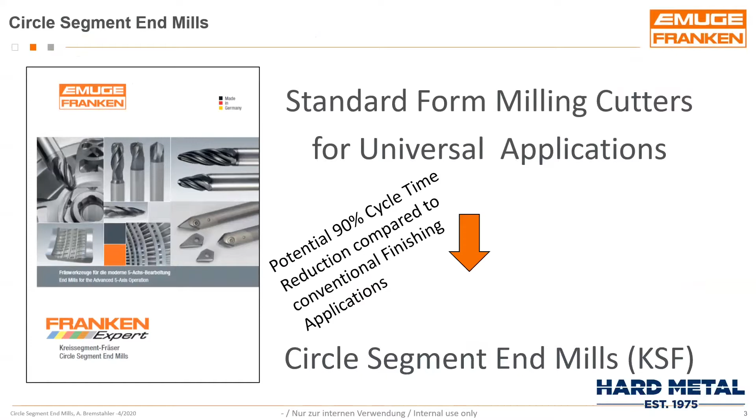Emuge Franken has a full range of standard milling cutters, but today I'm going to be talking about what they would call circle segmented end mills. Circle segmented end mills have the possibility to reduce cycle times by up to 90%. How we can do that is because when we look at today's technology for producing thin-walled surfaces, high walls, concave or convex surfaces, we have to scan using a traditional ball nose end mill.

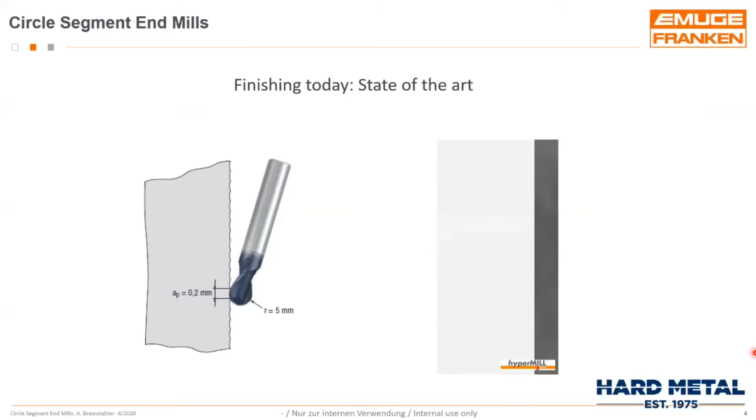And typically, if we looked at a 5mm radius or a 10mm diameter ball nose end mill, we would have to take step downs of 0.2 of a millimetre in the AP, in the step down, in order to achieve a high surface quality. So we're trying to achieve a small cusp height between the two steps. And this is where we have to take small axial depths of cut, and this can be very time consuming in order to achieve a high surface finish.

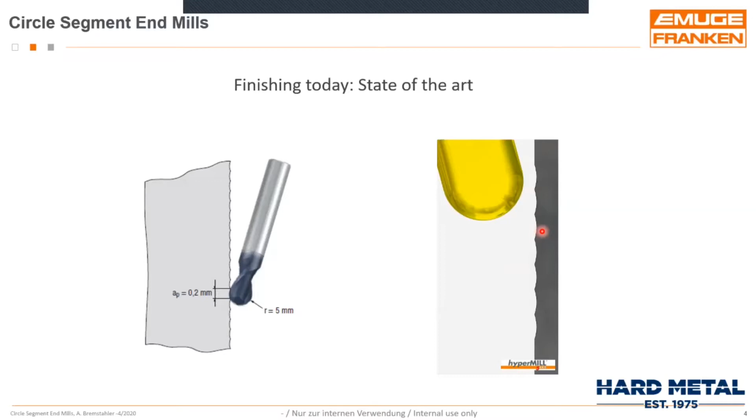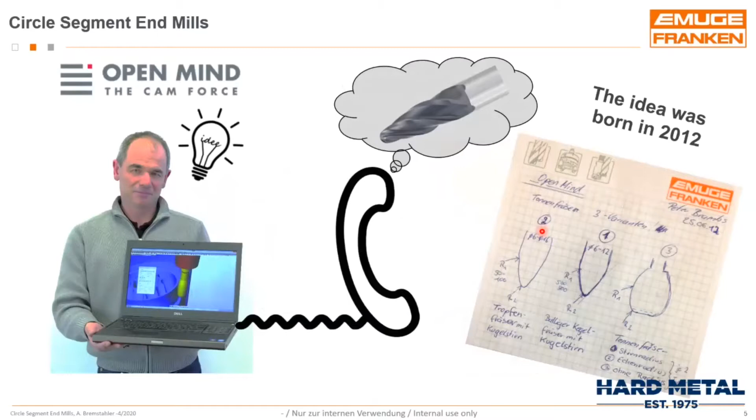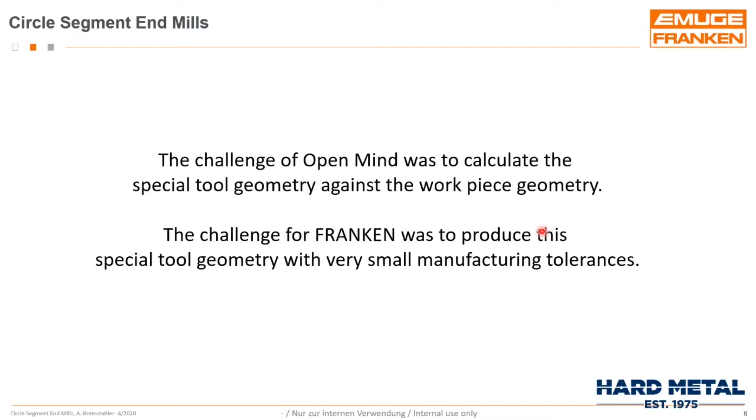Back in 2012, Emuge Franken and Open Mind got together and tried to think how they could solve this problem of reducing the cycle time dramatically. And on a sketch of paper, they basically came up with the concept of circle segmented tools. So how does the system work? Firstly, it was a challenge for both Open Mind and Franken together to define a geometry that would work against the workpiece, and for Franken to produce a tool geometry with very small manufacturing tolerances. So it was very much a partnership between the two companies to try and develop this technology.

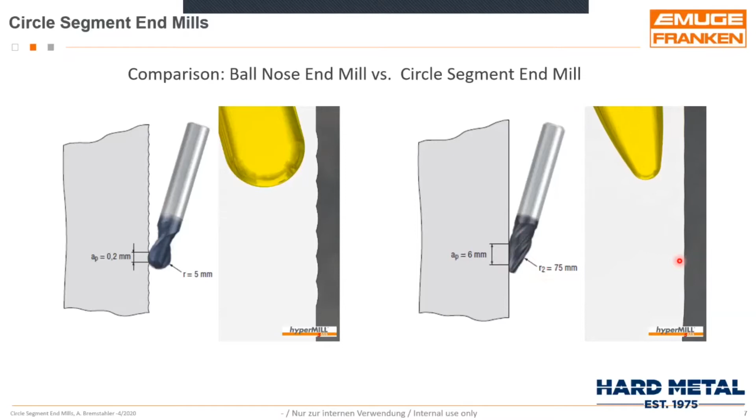So again, just to reiterate, on the left-hand side we see the traditional method of producing a thin wall, or a concave or a convex surface, with small step downs and small cusp heights in order to improve the surface quality. Whereas on the right-hand side, you'll see a very different shaped tool where we have a large radius, R2, of 75mm. This then enables us to take a much larger step down in the AP direction and create very small cusp heights between each step down, creating a very high surface finish. So this is where the concept was born.

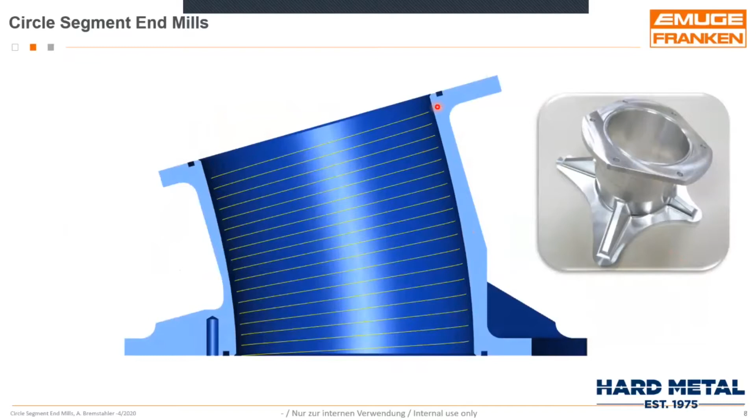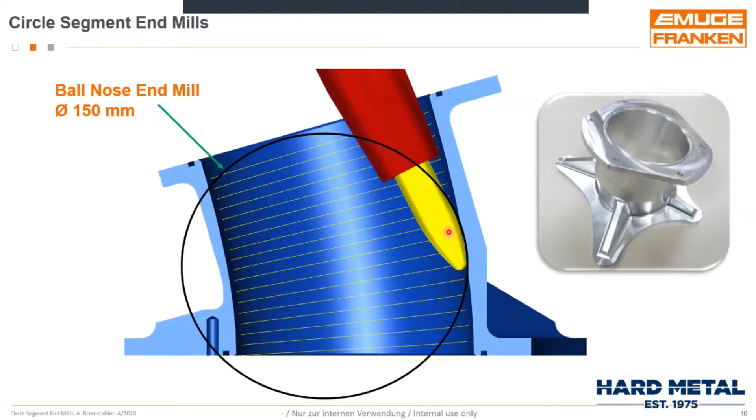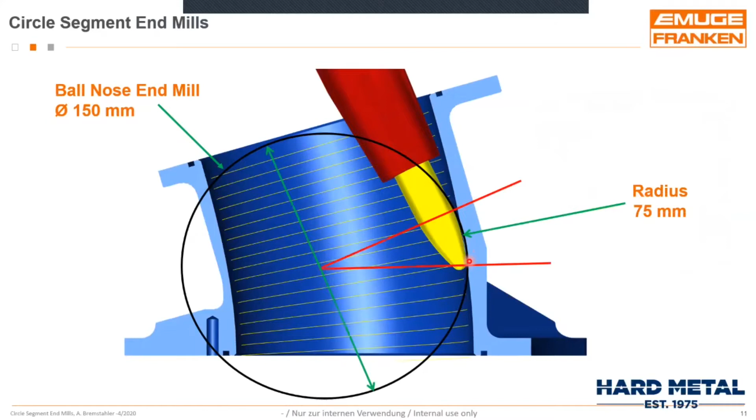If we put that into practice, if we look at a typical component here where we'd have to produce this concave surface using a ball nose milling cutter, in order to achieve something with a 75mm radius, we'd need a ball nose end mill of 150mm in diameter, which is totally impractical. So what we do, we take a part section of a tool, and we create the radius of 75mm on a segment, hence the term circle segmented tools. And now we can produce that large step down, whereas conventionally we would have been using small step downs. And this is how we reduce the cycle time dramatically.

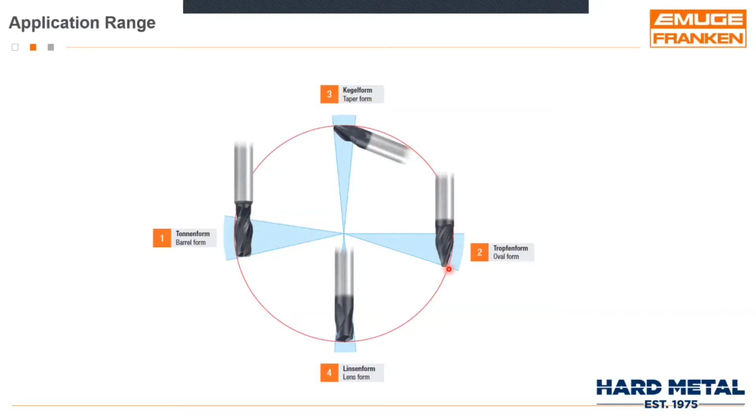So to summarise the range, it was developed, as I say, back in 2012. The range expanded in 2013 to include the two versions of the traditional taper and the taper tool. And then in 2015 they developed the lens type cutter. The lens cutter would be predominantly used for scanning flat surfaces or at the bottom of pockets.

In 2017, a further expansion included basically tools for machining turbine blades and the like. So these were specially developed with special geometries and through coolant capability. In 2019, they extended the range again with multi-flute type tools and even an indexable system. In 2020, the plan is to introduce micro circle segmented tools or barrel tools, and that will be phased in over the course of the year.

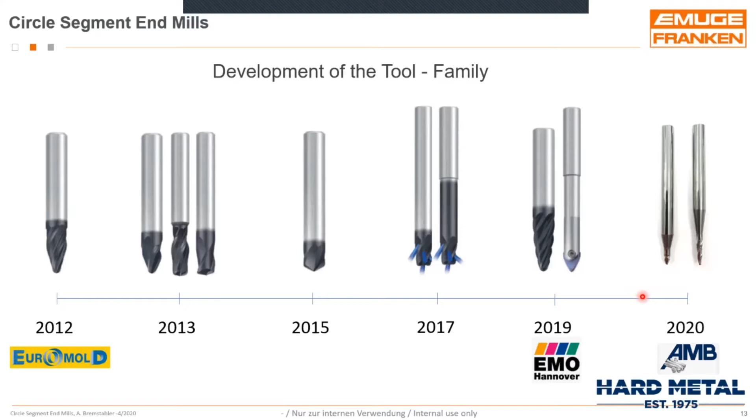They were to be introduced at shows, but unfortunately, as we all know, all of those sort of shows have been cancelled. So yeah, just to summarise, multi-flute options up to 6 teeth for both the taper form. These are used mainly on hard materials where we're taking small radial depths of cut. The new innovation of indexable systems gives us the flexibility to reach deep cavities.

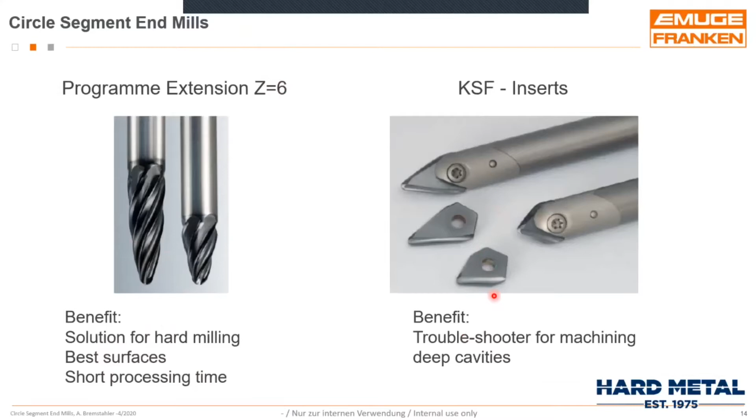As a supplier of both Emuge Franken and Hardmetal being a supplier of also ISCAR, ISCAR has developed its range of circle segmented or barrel mill type tools, which gives us the possibility to work within the medical industry because of our experience with machining the likes of cobalt chromes and titaniums.

What ISCAR have done is quite interesting in the fact that they've introduced the Multi-Master version, which gives us the possibility to use indexable heads in both the lens type, the tapered form type, as well as having the traditional solid carbide end mills. And as I say, given our experience within the medical industry, we are actively looking at developing tools specifically for producing the likes of the femoral knee.

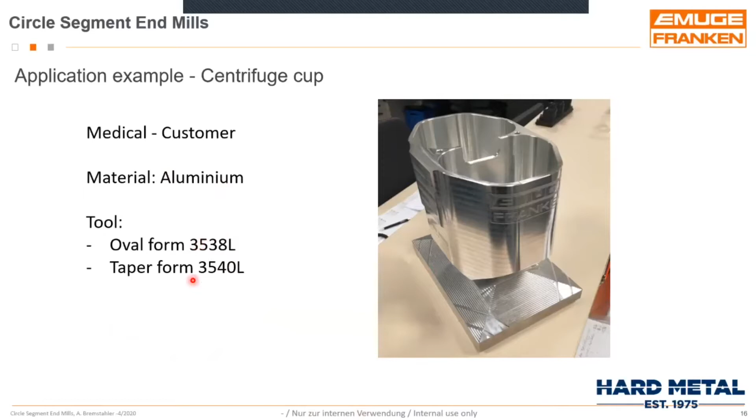I'm just going to show you a couple of videos before I move over to Simon. And this is usually to show you the tools in action. This is an example of a medical component made from aluminium using two types of the form cutters, the oval form and the taper form. And I'll just run you the video now.

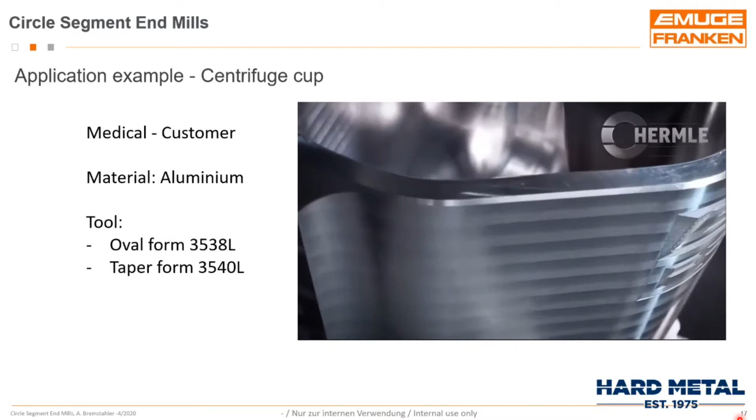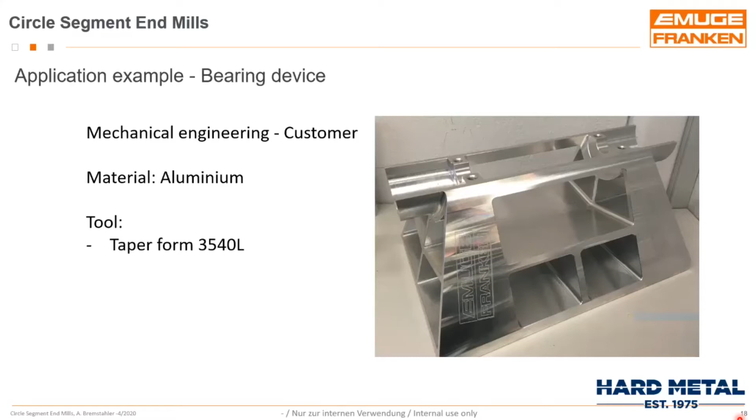Just moving on now to the next video, the rest of it was basically just face machining. So this is another example. This is using the tapered form tool, again, an aluminium component, mechanical engineering. It's just showing the tool again in a slightly different application area.

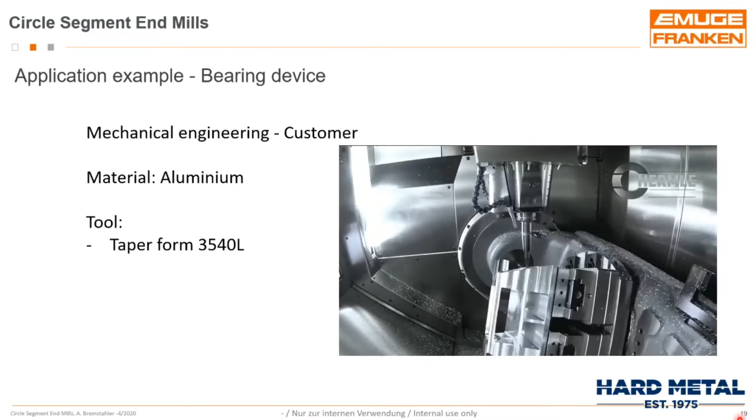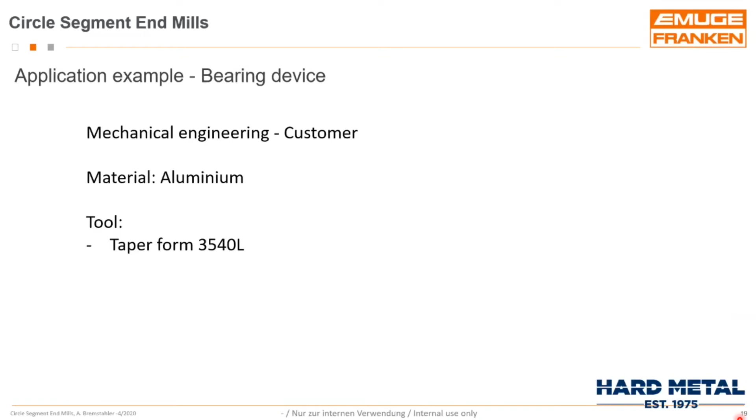Okay, what I will just add before I hand over to Simon is that the CAM package is vital in the success of using circle segmented tools or barrel mill type tools. So I'll now hand you over to Simon Docker from OpenMind.

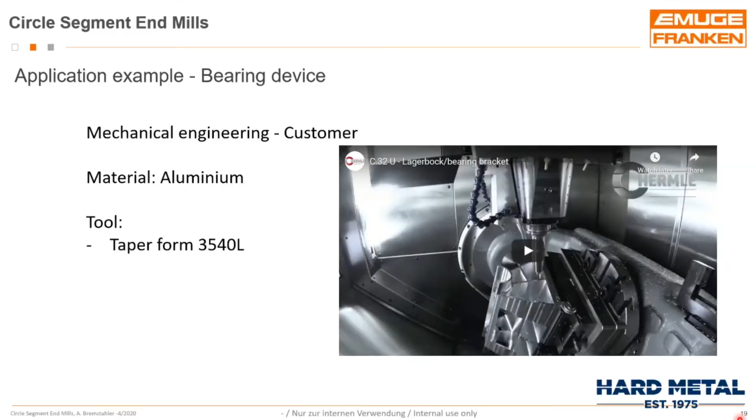So I'd like to focus on an aerospace structural part in the next few slides and some of the challenges that we experience today. We're seeing that the corner radius in pockets have been reduced to make parts lighter, and I see some very deep pockets. And when you combine a small radius in the corner with a deep pocket, this creates a machining challenge. Parts are becoming more complex, and certainly during the current situation, prices are being driven down. So really, how can we be more efficient, more productive, and reduce costs?

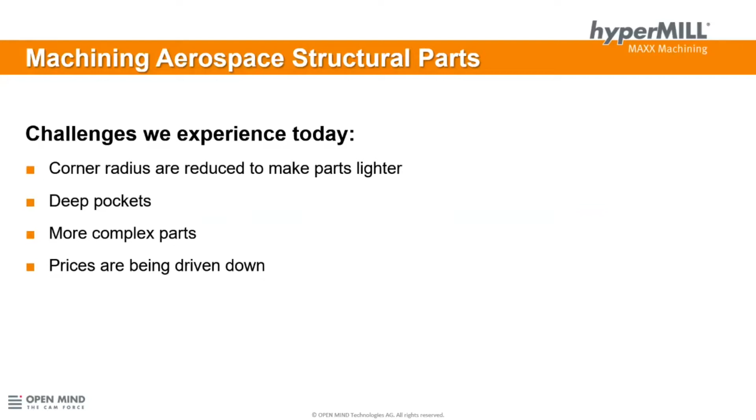Now, as Andy has already touched on, we can achieve faster cycle times using a combination of conical barrel tools or circle segment tools, as they may be called. But let's look at how this is possible. So what is the concept behind the design of a conical barrel tool? Well, as you can see, there is not only a long radius along the flute length, the tool is also tapered and ball nose. Now I'm referring to this tool here.

So this is where the tool is very effective, as the taper forces the tool to tilt, avoiding the collision between the part and the tool holder, and the ball nose allows us to use the same tool to finish areas such as small radiuses in the corners of deep pockets that I mentioned previously. So because you're tilting the tool away from the part, this allows you to keep the tool length to a minimum, and therefore tools are more rigid and less likely to produce tool chatter.

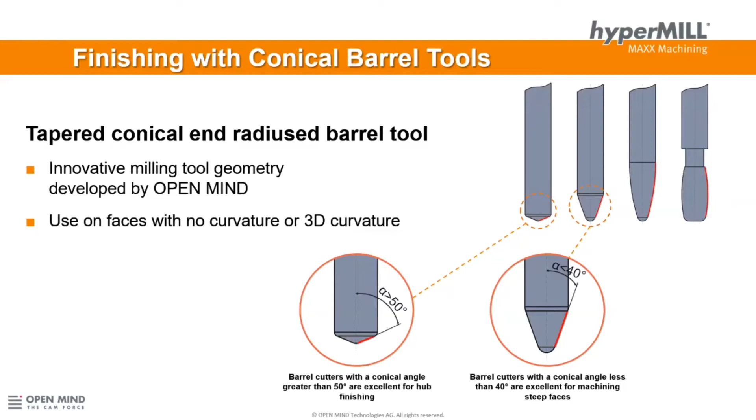So the potential gains can only be achieved if the CAM system has the necessary cycles, as Andy has just mentioned. So to utilize these types of tools within hyperMILL, there are dedicated cycles that have been developed especially for use with conical barrel tools, and I'll explain what these are. So the first one is tangent plane machining for planar surfaces, and it's extremely useful when machining deep pockets and hard to reach areas using conical barrel tools.

Now, typically to machine a deep pocket such as this one here, a ball nose tool would have to be used with the head tilted over to avoid the collision with the tool holder, but you would only be stepping down probably 0.2 of a millimeter, for instance, so the machining times will be obviously much greater. However, with the combination of conical barrel tools and hyperMILL tangent plane machining, you could be stepping down up to 6 millimeters, yet still achieving a superior surface finish.

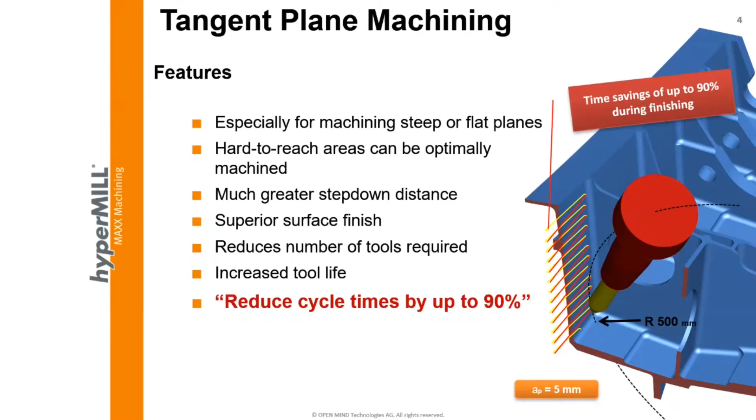Here's another example of a lens style conical barrel tool where the barrel radius is on the bottom of the tool, and these tools are useful when machining the bottom surface of very deep pockets. A conventional end mill couldn't be used in this instance because, due to the sheer depth of the pocket, that would be impossible because the tool would be too long. So again, the tangent plane machining cycle will be used for this face also.

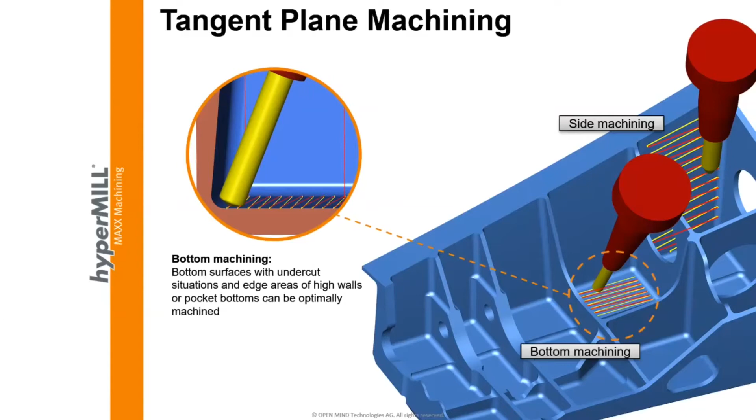So let's compare the machining of a planar surface using a ball nose tool against a conical barrel tool. Now, as you can see, if I run the video, the step down is much greater, so the cycle time will be much, much quicker. Now, this all seems so simple and obvious, doesn't it? But what is the technology behind the MAXX Machining cycles that makes them so special?

Now, as you can see, as the tool is traveling along the face, the head is being tilted simultaneously away from the surface, and this avoids the collision between the holder and the part, and also reduces the excess material left in the corners. Now, if I can stop the video at this point and just go back one moment, just slightly.

So the very fact that we're stepping down at 6 millimeters, this will leave a wedge of material in the corners, and you can see the wedges here. But within the same tangent machining cycle, there is an option to clean up the corners using a rest material style approach using the ball of the tool. And I'll let that continue, and you can see here.

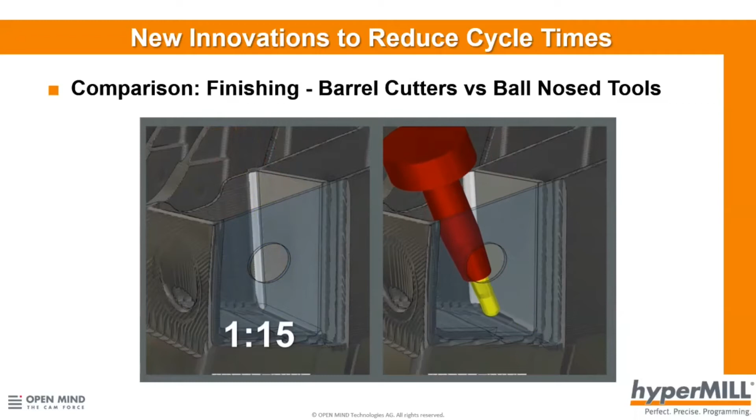So within the same cycle, using exactly the same tool, almost 2 cycles combined into one, using both elements of the tool. So we conclude that this is a multifunctional tool and CAM cycle to utilize the whole tool and reduce the need for additional tooling to be used. And obviously the time comparison speaks for itself, it's much, much quicker.

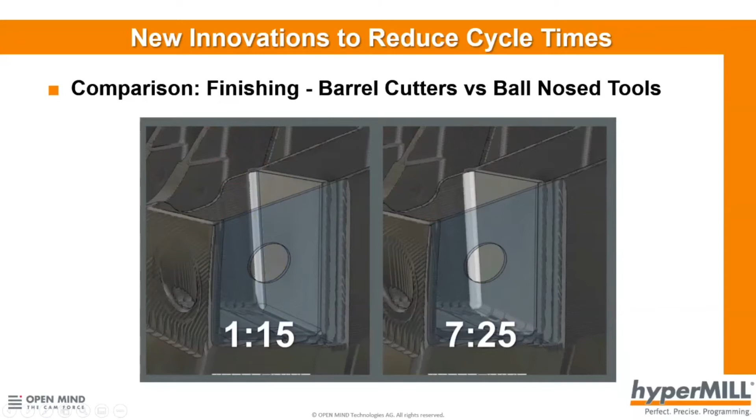Okay, so here's the same cycle and tooling, but we're actually machining an aerospace structural part. Now I'm going to stop the video at this point once again, because you may notice that the head is fixed at the same angle when machining this area here, as this edge of the pocket is open-ended. So hyperMILL is only moving the head when necessary to avoid unnecessary axis movements. And you'll see that if I play it. So it's fixing the head, no need to move the head.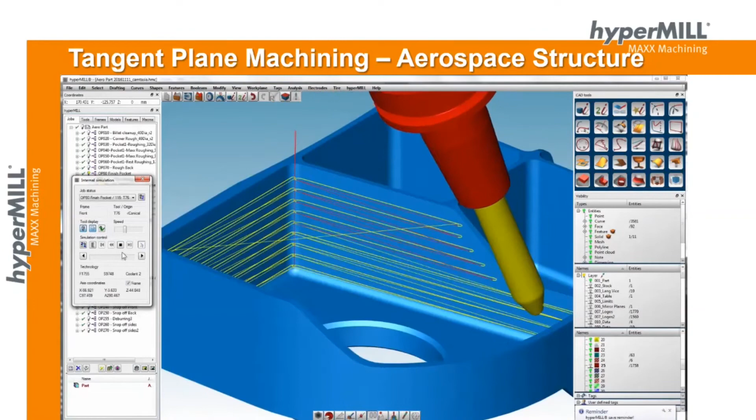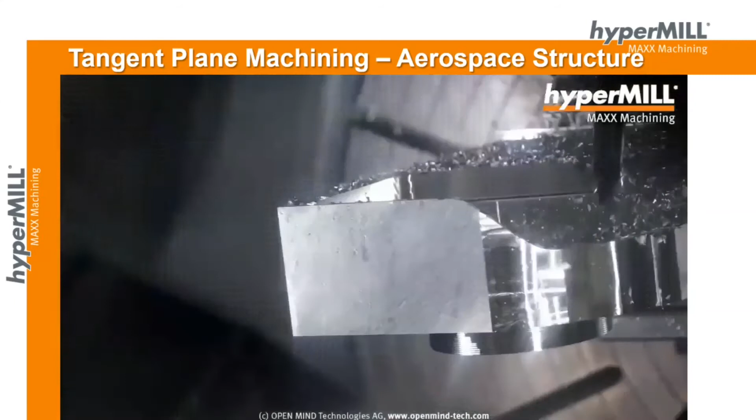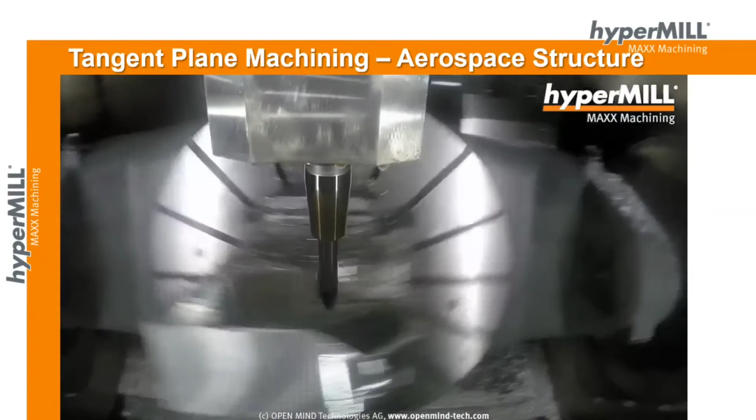And now only when the pocket is contained does it then switch to a simultaneous 5-axis motion. And this is a completely automatic process. So here you can see it's fixed the head, no need for excessive movement at this stage, only when it needs to. When it's within a contained pocket, now does it switch to the simultaneous movement. Whoops, it's gone back. Okay, there we go. Once again, it's fixed head position. Within a contained pocket, it now switches to a simultaneous movement.

Now, this is a completely automatic process, as mentioned, and it's almost one of the simplest cycles of Hypermill. It's probably one of the easiest ones within Hypermill, in fact, to program, because it's simply a process of selecting the surface and hitting go. I'll let it continue.

And pausing it once more, this is where it flicks to the ball of the tool to pick out these wedges that the body of the tool left in the corners. And these are automatically removed, as I mentioned, almost like a bounding or a rest material process. One tool to do the whole of that pocket. Okay.

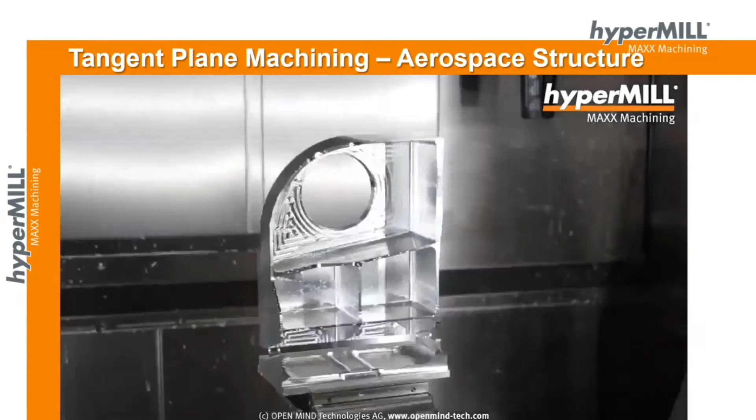Okay, so now let's move over and focus on where these tools and CAM cycles can be used to machine medical parts. Now, in this instance, we'll be looking at a femoral knee surface. Again, we can achieve a massive cycle time reduction, reduce tooling costs, and we really can increase the accuracy of the machining also.

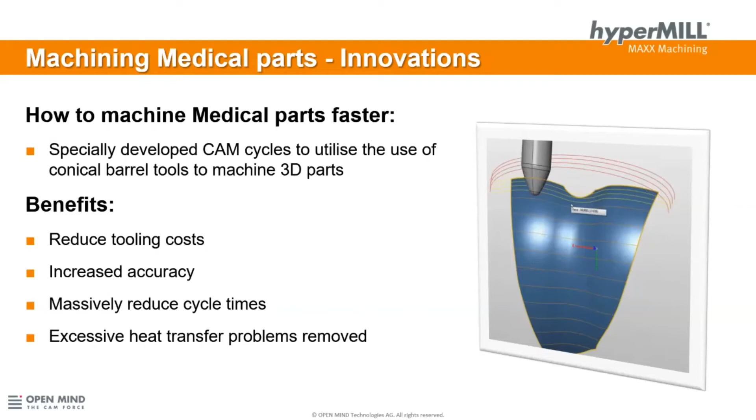So the previous cycle that we used was called tangent plane machining for planar surfaces, but now we're actually machining a 3D face, and this is where we use tangent machining. And these can be convex, concave, doubly curved surfaces, and we have a cycle called simply tangent machining for 3D faces. Now, similar to the tangent plane cycle, in collision areas the tool is automatically tilting upwards away from the contact point, while still remaining in contact with the part to reduce witness marks. Obviously, the more we retract and re-enter the part, this will leave unwanted dwell marks, for example.

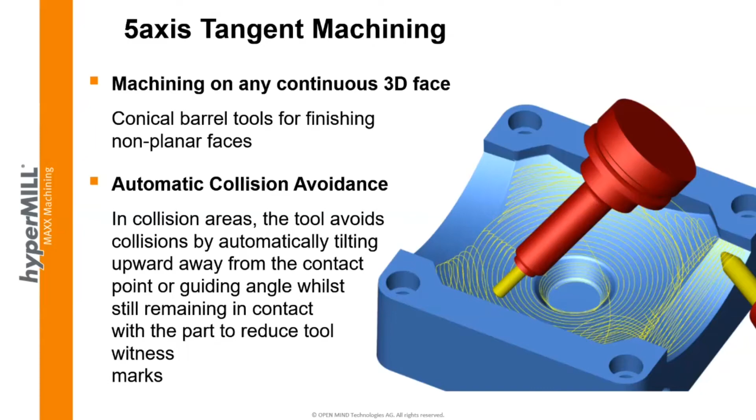So, if we look at this area of the part, that was machined conventionally using a ball nose tool, and then again with Hypermill tangent machining using a conical barrel tool. When we weigh up the cost of the tooling, the machine rate per hour against the total machining cost, although the cost of the tooling, the barrel tool, is higher, the total saving is actually 83%. So I think you'll find that's quite staggering.

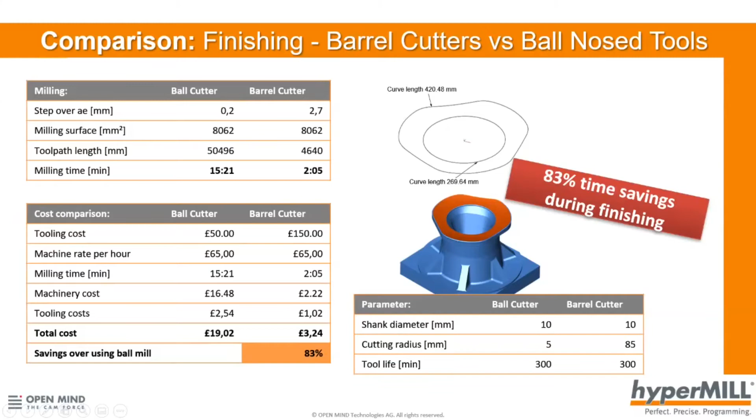So it's plain to see that the combination of conical barrel tools and Hypermill MAXX machining cycle is much quicker than conventional methods of machining. But let's see how we can put this into practice to program this femoral surface. We're not limited to what type of surface we can machine. Okay, this is a complete, organic shape, as is many cases in the medical industry.

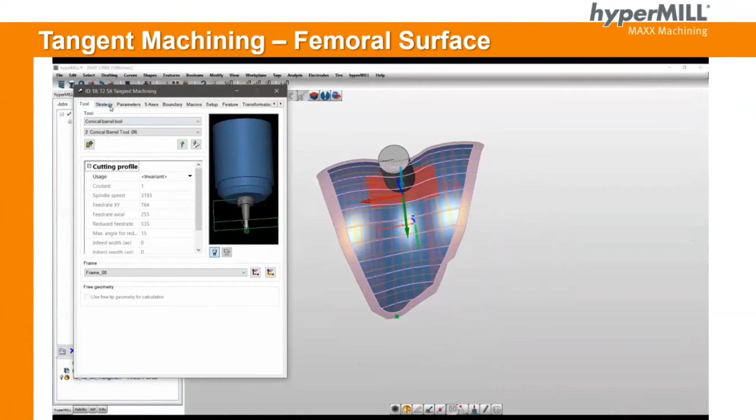In here, I've actually included spindle geometry. It's a nice part of our software, is that you can actually calculate and check against the spindle from calculation as well. You don't have to wait until simulation. So this is tangent machining, and this is also a cycle that has the capability for automatic surface extension. And it's quite nice for these areas, certainly when you're doing freeform. So again, I've just picked the surface that I want to machine.

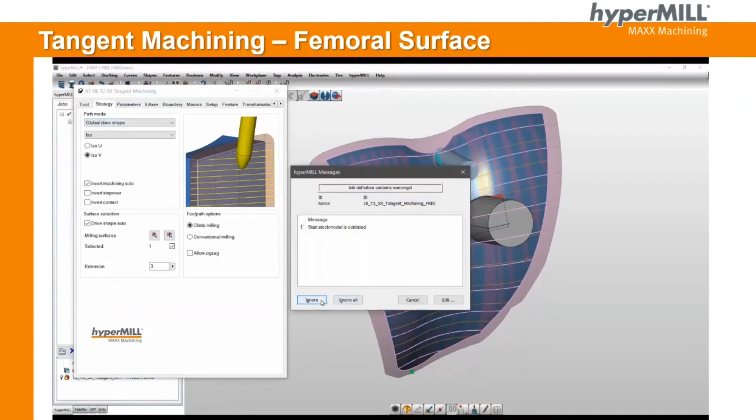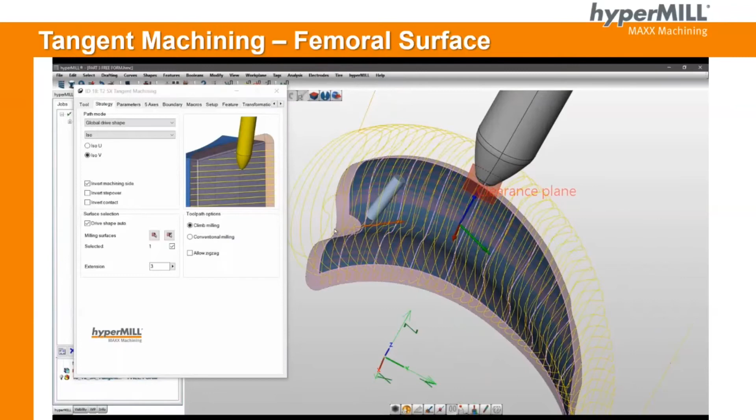And we can get a real nice result going down here. So what's nice about this tangent machining is with certain controls, you get feedback on how you want the tool to machine this surface, whether you want to go up, down it, which side of the surface you want to machine. You get nice feedback as to what it's going to produce. Now you can see this is a lovely clean toolpath it's created. We'll just close the cycle off a second.

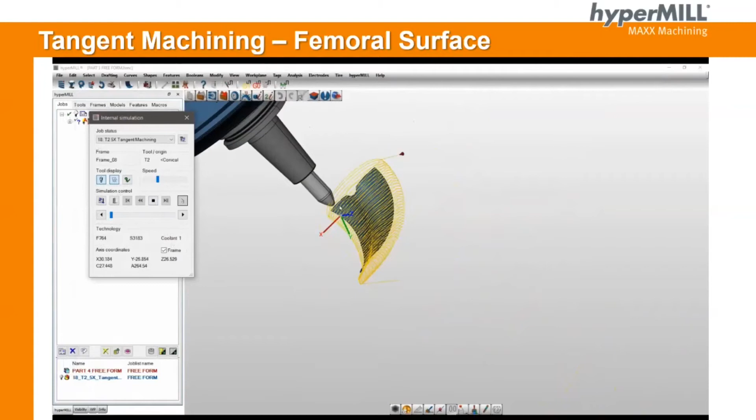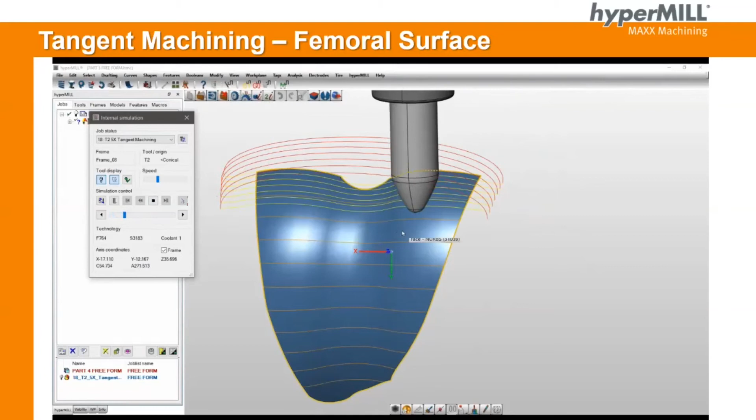Okay, so we can see it tracking the surface. Obviously the surface extension did fill in the gap a little bit, but the less retracts you have to do off the part, less repositions, the better. So that's where also it helps. You can see, if I just turn the model to the side a little bit, the contact at the moment I actually have set towards the tip of the tool. Okay, so this is something that we can actually manage inside hyperMILL.

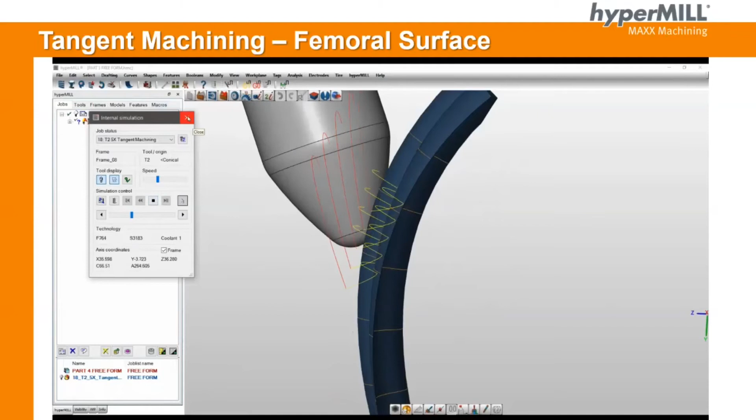Is how much of that edge or what contact point on the circle segment are we using? Now, when you're doing certainly hard materials, you can probably get quite heavy wear using the same point. You get notch wear and all the rest of it. What we have the capability to do is control the contact parameter, and it's dynamic. So I could start at 0.5, which is halfway up the barrel, and I could end on 0. So I'm utilizing the full edge of that tool. Or I could start at 1 and then utilize it.

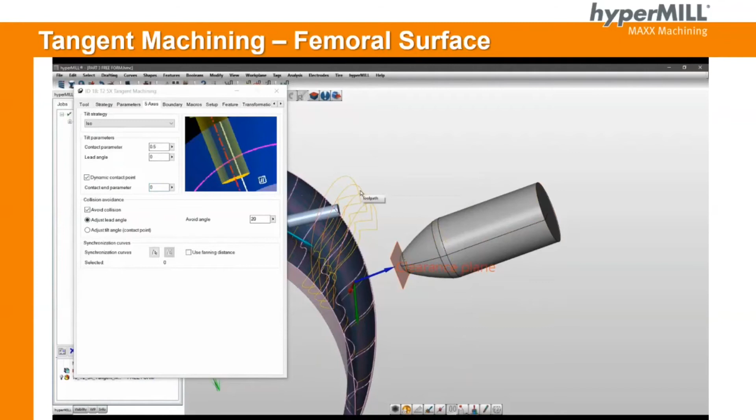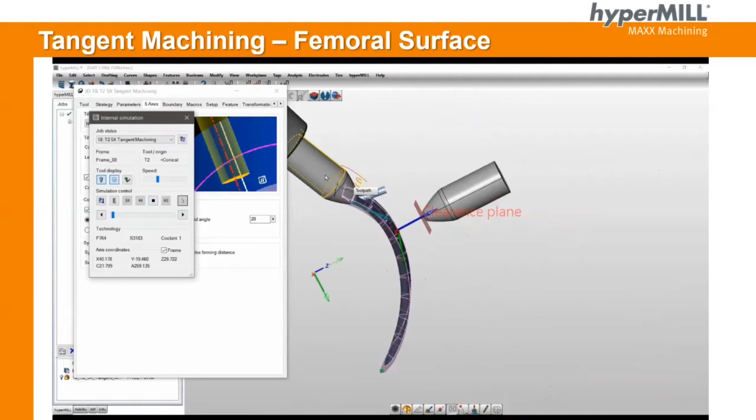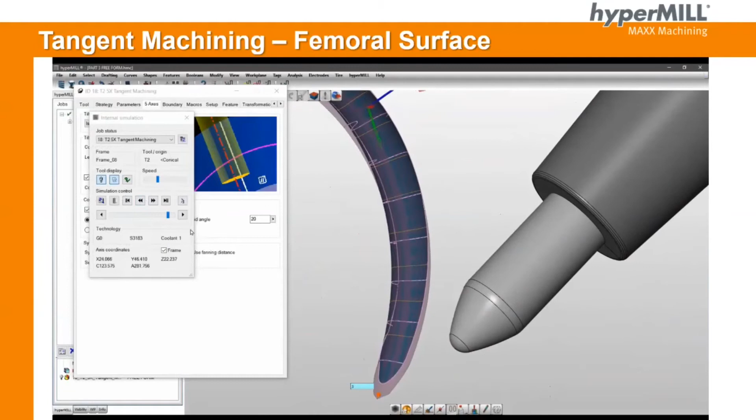Okay, so we should see now first cut. You see the contact point is now halfway up the barrel for the cuts, and it will adapt and slowly change the contact point the further it gets down the surface. So if I was to skip maybe down towards the end. Just rewind a little bit. So now no longer utilizing halfway up the tool, it's utilizing the tip.

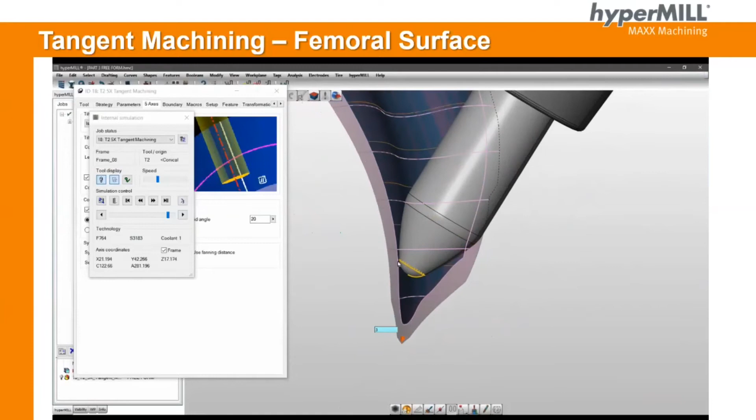So this control allows you to sort of eliminate the heavy first cut that you often get, and also the rest material that will be left at the bottom of the surface. By tilting the tool forward and utilizing closer to the tip, you get closer to the form and you don't leave the wedge of material. Okay, so yeah, to have that level of control where you can vary the contact point, and gradually balance the wear on that tool is really quite an innovative and unique feature, I believe. So keeping tool wear to an absolute minimum and having full complete control over the contact point of that tool.

Now, one of the common questions is, as this is a completely organic 3D surface or shape, although many tooling providers provide off-the-shelf conical barrel tools, it's quite common that we need to use custom tools. And companies such as Hard Metal can provide both standard and custom tools. But how do we know what the geometry of the custom tool will need to be? So here goes.

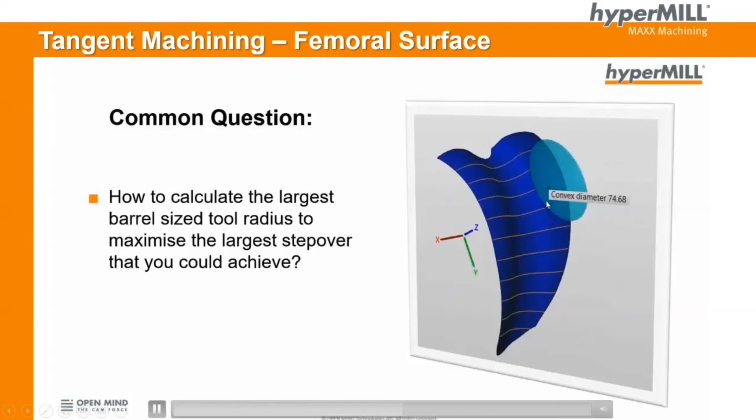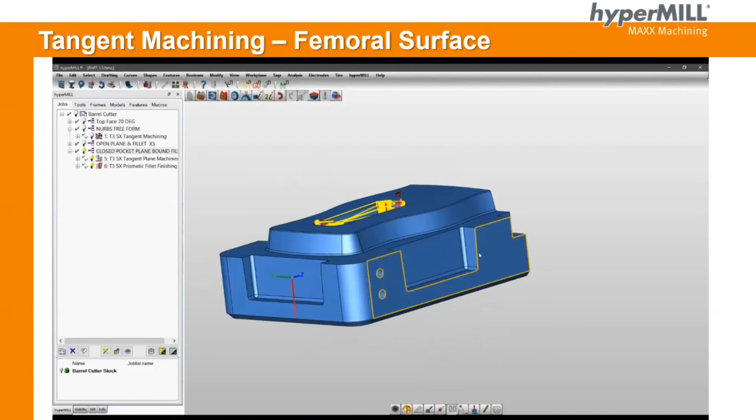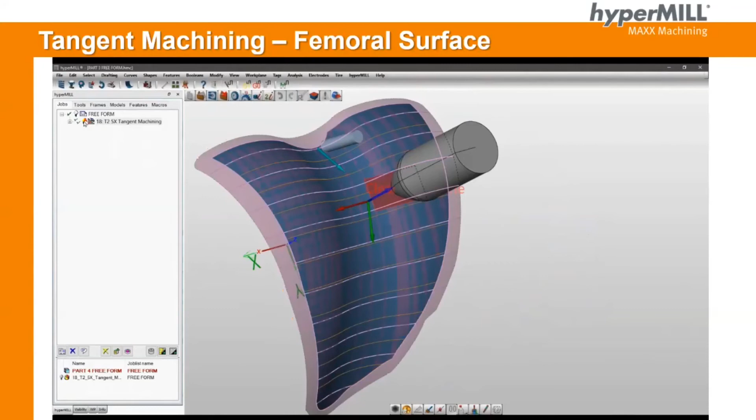Okay, so the most common case of choosing your barrel radius size comes down to the geometry that you're machining. Now, when you're machining flat planes, you go as large as possible to maximize your step down. But with freeform geometry, it all depends on, first of all, surface finish requirements, whether these surfaces are being worked afterwards. I know in this instance, these surfaces are actually finished, so they're only after a finishing operation that gets you to within 0.1, 0.2 of the surface as quick as possible. And that's where barrel tools have come in on this surface.

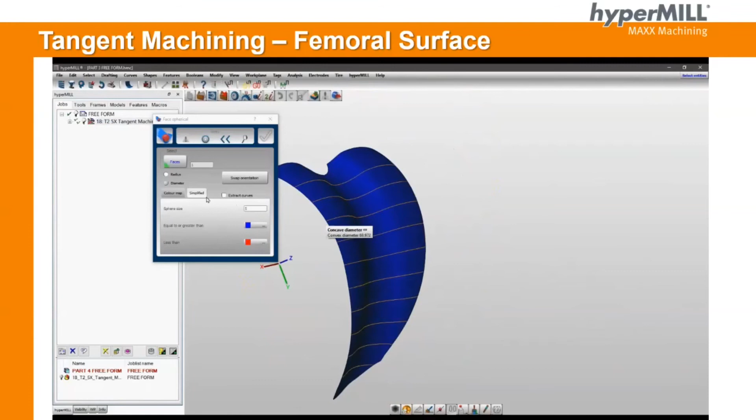To select my barrel tool size, I actually look at some of our analysis tools, and we've got a tool here called Face Spherical. So for this surface, Face Spherical places a ball or radius on the surface, and by increasing or decreasing the sphere size, you can start to see failure.

So it's quite often common to get a barrel mill with 1,000 radius. So I'll type in sphere size on radius mode 1,000, and I can see tracking over the surface instantly in red. I'm going to struggle to get the tool tangentially in there for a nice roll around. So that to me is an indicator, right, I need to start decreasing my barrel size. I'm not properly going to hit all of the surfaces.

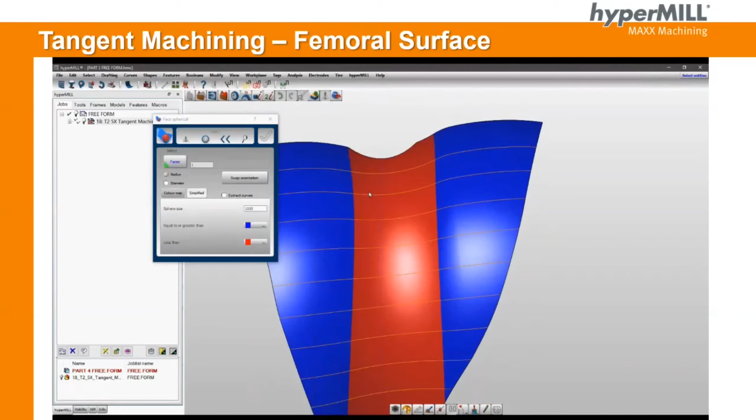Now, when you're looking at tangent machining, okay, and you're using drive surfaces, it's collision checking against the surface. So as long as it's rolling over, you know it's not going to gouge into the model. Okay. You can see around the 40 mark on these areas. So this is a good tool to get a rough size.

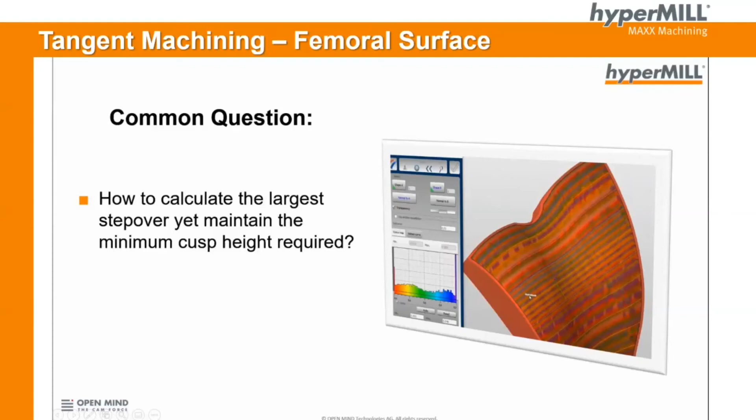Great. So another common question is, how do I know what step over to use to achieve the maximum cusp height that would be allowed? Obviously, we can see that we can take much larger step overs when compared with bullnose tools, but we still want to maintain that cusp height. So here we go. One of the nice tools that we can use here is shape to shape distance. So shape to shape distance, I have my surface as one surface, shape A and shape B.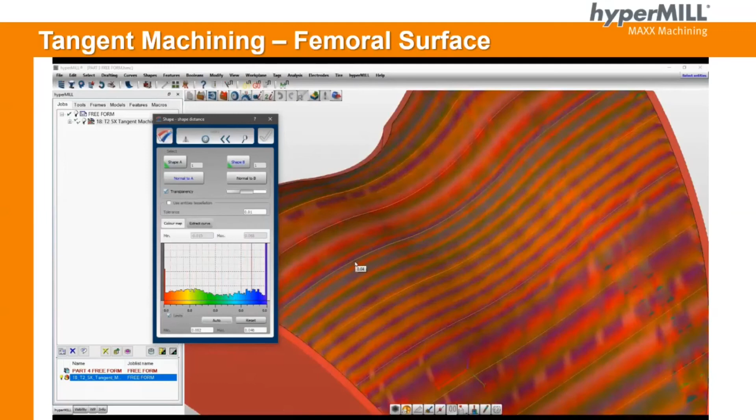I can use my stock model left over from the cycle, and with a little bit of tolerancing factors, let me get to sort of 10 micron tolerances, I can now get a really nice color map going of this area and feedback at cursor point as to my scallop height. Okay, so I think with this part, I've got 50 micron maximum scallop left over from the barrel machining, which is absolutely enough for this surface with the work that's happening afterwards. But that figure is depending now.

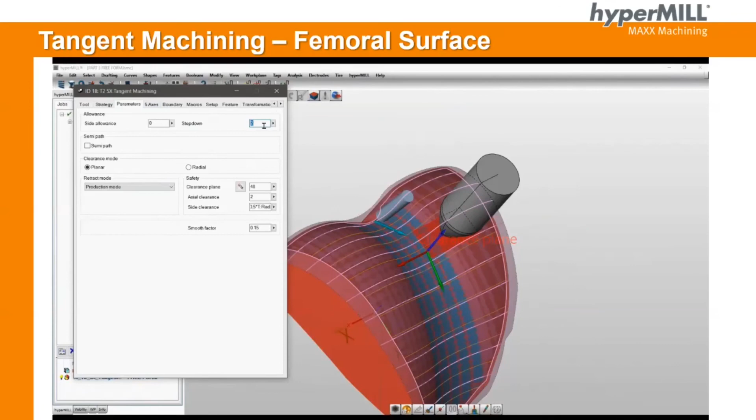Okay, can I increase my step down by another 2 mil? Yeah, you just check in against what your known parameters are and adjust the tool size and barrel radius to suit to get the maximum quickest result. So yeah, a couple of tools there: Face Spherical, shape distance for checking the stock model afterwards.

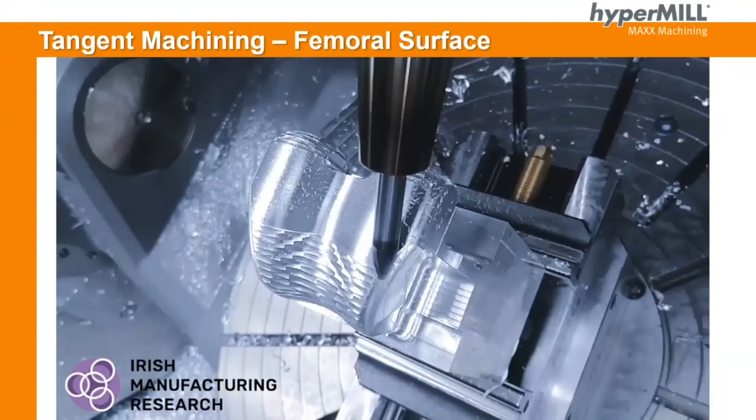Okay, super. So the IMR really very kindly cut this part on their facility on their Hermle C42, so that you can see the tool movement and see the surface finish you can achieve. I'll run that video, and I really do hope that you can agree that the results are pretty good. Obviously hyperMILL is restricting the tool movement. We don't want that tool flying all over the place. It's a great surface finish, well within the tolerance that we need.

And I must stress, however, that this is only a concept part, so it was machined in aluminium. So it was just to really give you an idea of how hyperMILL is controlling the tool across that femoral surface. Just to add to that, if you don't mind, Simon, just to point out that the tool that was actually used was a 10mm ISCAR taper barrel tool. Thanks, Andy. Okay, yeah, I'll flick to the next slide now.

Okay, last but not least, another real high level of growth within the hyperMILL user base is the use of hyperMILL automation. Now, it's designed to reduce programming times, especially for parts of a similar nature, or families of parts, as they may be called. Now, hyperMILL automation uses methods defined by the user and applies the same methods on the next part. So especially for medical parts where the shapes are similar but only the sizes are different, the programming times could be reduced to almost zero in some cases.

And really the same applies to aerospace parts also. So I just wanted to drop that in, that hyperMILL automation is available, and it's certainly becoming extremely popular, especially during these really difficult times.

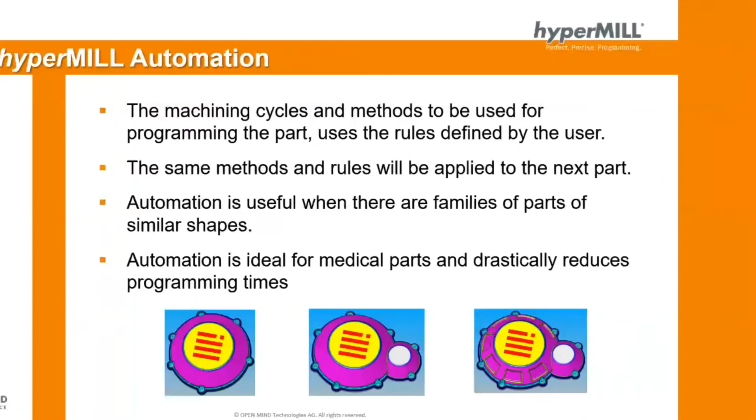Hey guys, thanks very much. That was very interesting and gives a really good overview. I hope that helped to clear up a few things around the topic of barrel milling, and I would like to thank everyone for attending today.